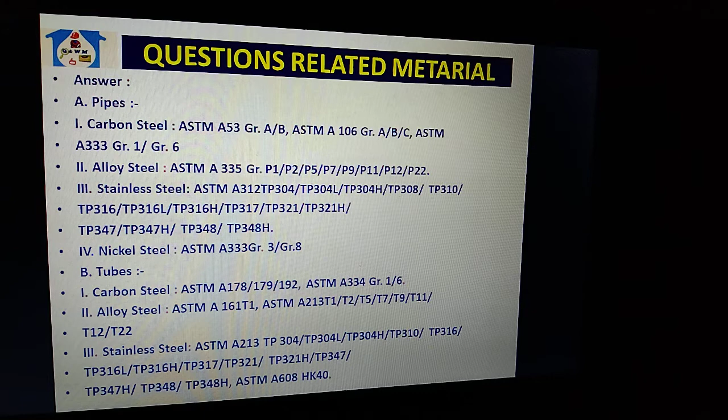Stainless steel: ASTM A213, TP304, TP304L, TP304H, TP310, TP316, TP316L, TP316H, TP317, TP321, TP321H, and TP347, TP347H, TP348, TP348H, ASTM A608 HK40.

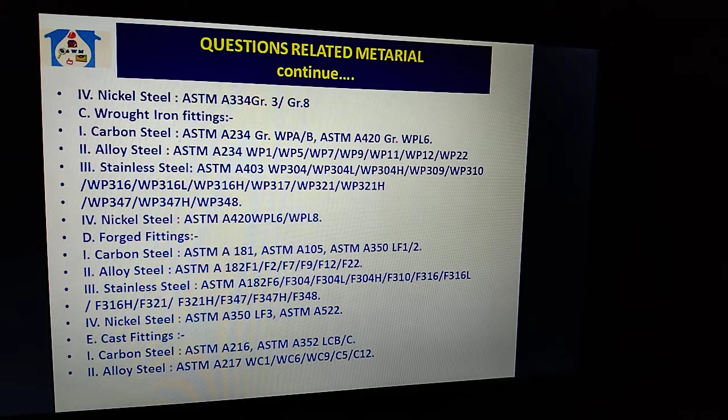Nickel steel: ASTM A334 grade 3, grade 8. Wrought iron fittings, carbon steel: ASTM A234 grade WPA or B, ASTM A420 grade WPL6. Alloy steel: ASTM A234 WP1, WP5, WP7, WP9, WP11, WP12, WP22. Stainless steel: ASTM A403 WP304, 304L, 304H, 309, WP310.

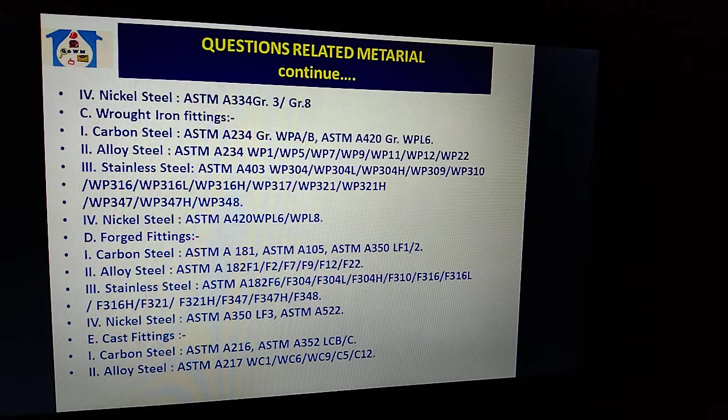Carbon steel, nickel steel: ASTM A420 WPL6, WPL8. Forged steel, forged fittings, cast iron, carbon steel: ASTM A181, ASTM A105, ASTM A350 LF1, LF2. Alloy steel: ASTM A182, F1, F2, F7, F9, F12. Stainless steel and nickel steel - all grades are noted here.

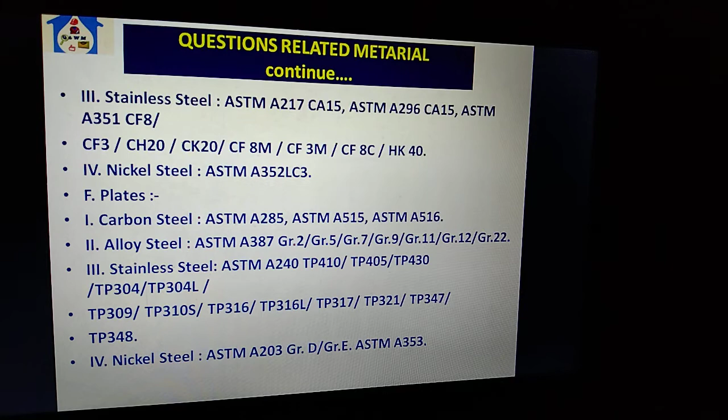What is the basic difference between pipe specification ASTM A106 grade A, grade B, grade C? Answer: the difference is due to carbon content.

Percentage of carbon content: ASTM A106 grade A, 0.25% carbon. ASTM A106 grade B, 0.30% carbon. ASTM A106 grade C, 0.35% carbon.

What is the difference between pipe specification ASTM A312 TP304, ASTM A312 TP304L, ASTM A312 TP316, ASTM A312 TP316L? The difference is due to the carbon content. The letter L denotes lower percentage of carbon.

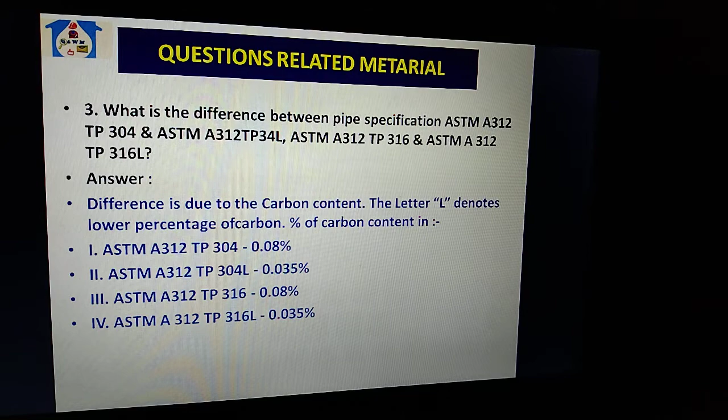Percentage of carbon content in ASTM A312 TP304 is 0.08%, ASTM A312 TP304L is 0.035%, ASTM A312 TP316 is 0.08%, ASTM A312 TP316L is 0.035%. L means lower carbon, lower percentage of carbon.

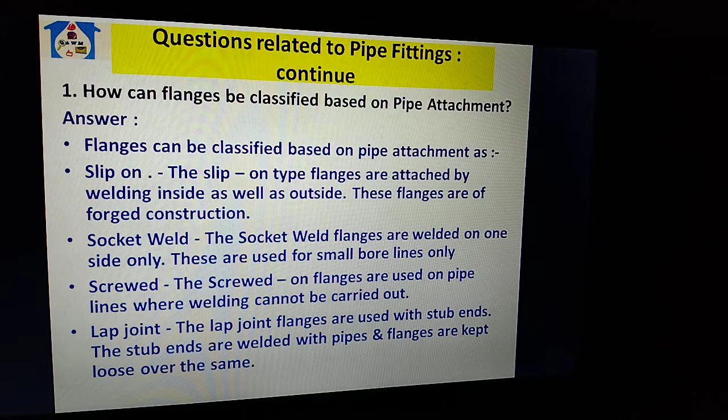Socket weld: the socket weld flange are welded on one side only. These are used for small bore line only.

Screwed: the screwed on flange are used on pipeline where welding cannot be carried out.

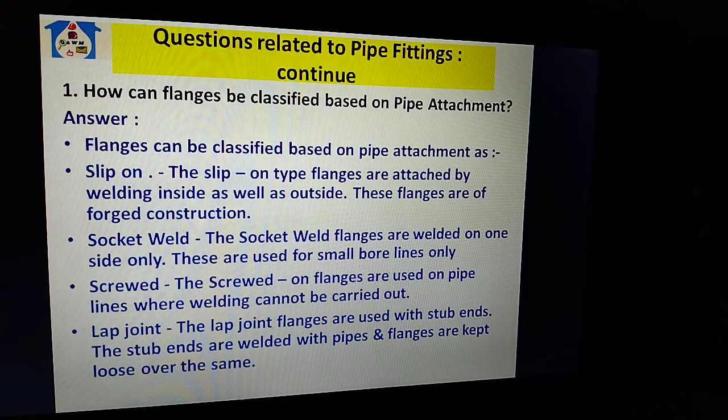Lap joint: the lap joint flange are used with stub ends. The stub ends are welded with pipe and the flange is kept loose over the same.

Question related to pipe fitting. Welding neck: the welding neck flange are attached by butt welding to the pipe. These are used mainly for critical service where the weld joint needs radiographic inspection.

Blind: the blind flange are used to close the ends which need to be reopened.

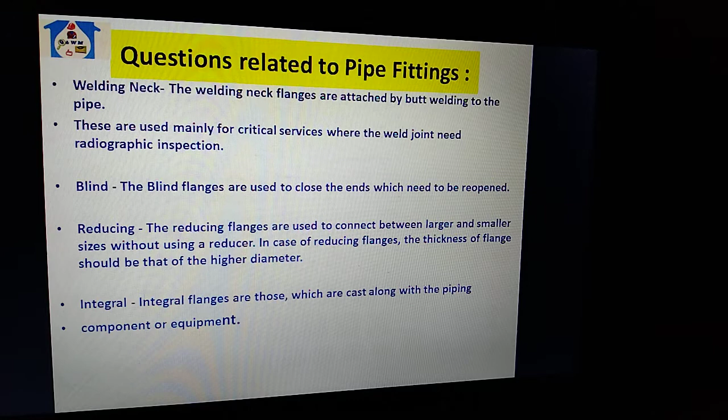The reducing flanges are used to connect between the larger and smaller sizes without using a reducer. In case of reducing flange, the thickness of the flange should be that of the higher diameter.

Integral flanges are those which are cast along with the piping component or equipment.

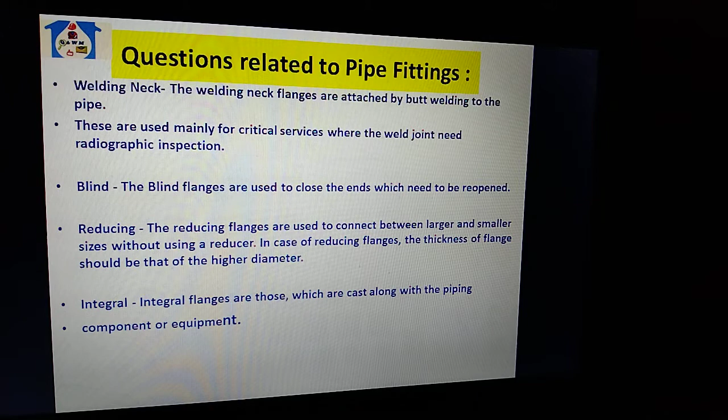How can flange be classified based on pressure temperature ratings? Answer: flanges are classified based on pressure temperature ratings.

The classes are A 150, B 300, C 400, D 600, E 900, F 1500, G 2500.

Pressure temperature rating charts in the standard ASME 16.5, which specifies the non-shock working gauge pressure to which the flange can be subjected at a particular temperature.

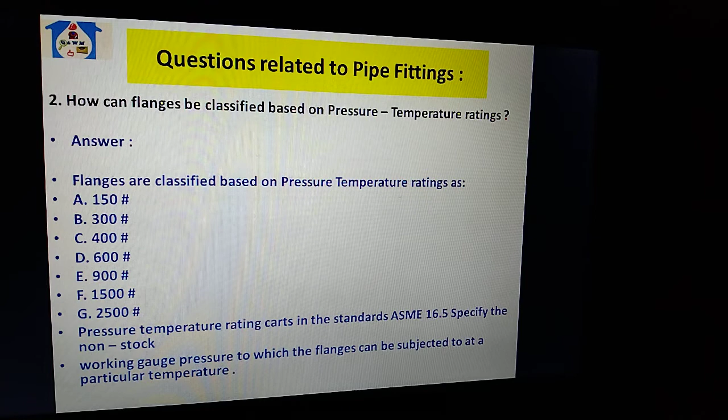How can flange be classified based on facing? Answer: flanges are classified based on facing as flat face (FF), raised face (RF), tongue and groove (TG), male and female (M/F), and ring type joint (RTJ).

How can flanges be classified based on face finish? Answer: flanges are classified based on face finish as smooth finish, and serrated finish.

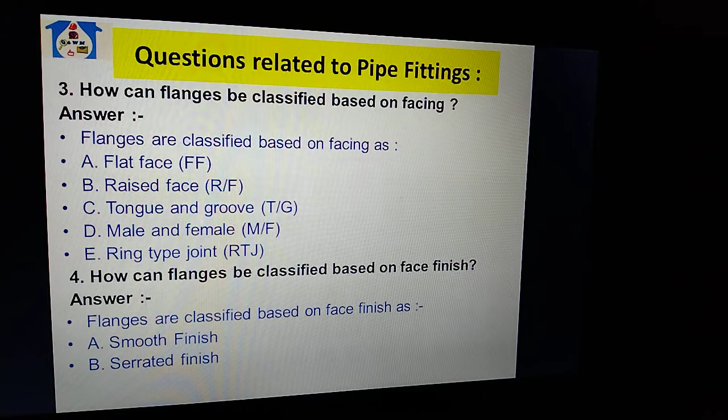Find the use of smooth finish flange and serrated finish flange. Answer: the smooth finish flange is provided when a metallic gasket is provided, and the serrated finish flange is provided when a non-metallic gasket is provided.

What are the types of the serrated finish provided on flange face? Answer: concentric or spiral, and phonographic.

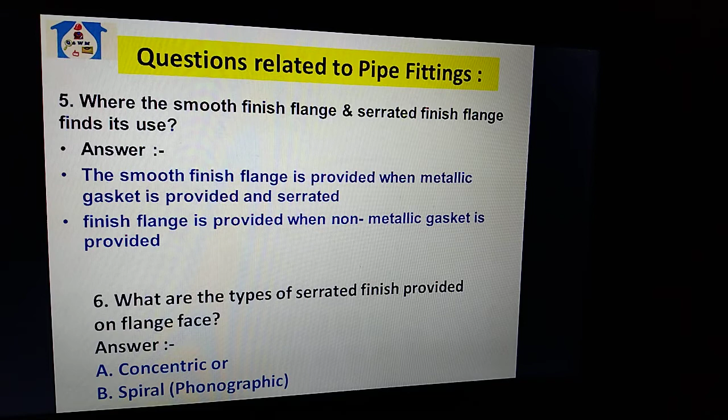How to specify serrations of flanges? The serration of the flanges is specified by the number, which is the arithmetic average roughness height (AARH).

Where is concentric serration insisted for face finish? Answer: concentric serration is insisted for face finish where the fluid being carried has very low density and can find leakage paths through the cavity.

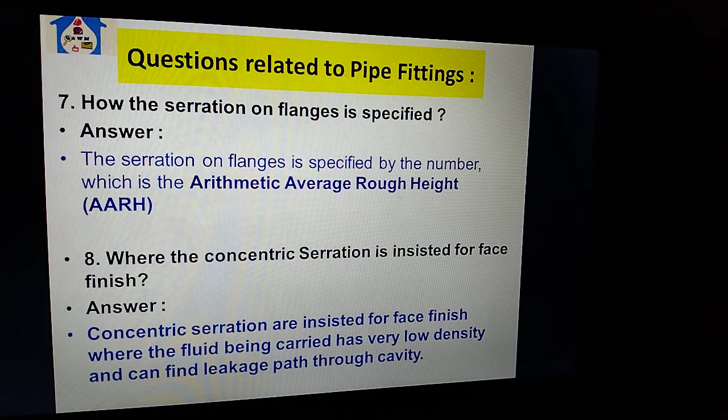What is the most commonly used material for gasket? Answer: compressed asbestos fiber.

Which type of gasket is recommended for high temperature and high pressure application? Answer: spiral wound metallic gasket.

What are the criteria for selection of MOC of spiral wound metallic gasket winding material? Answer: the selection of the material of construction of the gasket winding depends upon the corrosive nature and concentration of the fluid being carried, the operating temperature of the fluid, and the relative cost of the alternate winding material.

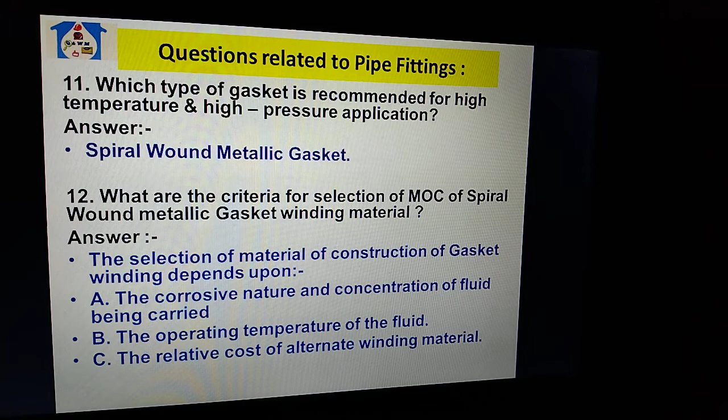What are the most common materials used for spiral wound metallic gasket winding? Answer: the most commonly used materials are Austenitic stainless steel 304 with asbestos filler, Austenitic stainless steel 316 with asbestos filler, and Austenitic stainless steel 321 with asbestos filler.

Which material is used as filler metal for spiral wound gasket in case of high temperature service? Answer: for very high temperature service, graphite filler is used. For high temperature service, the graphite filler is used.

What is the centering ring in connection with a spiral wound gasket? Spiral wound gaskets are provided with a carbon steel external ring called the centering ring.

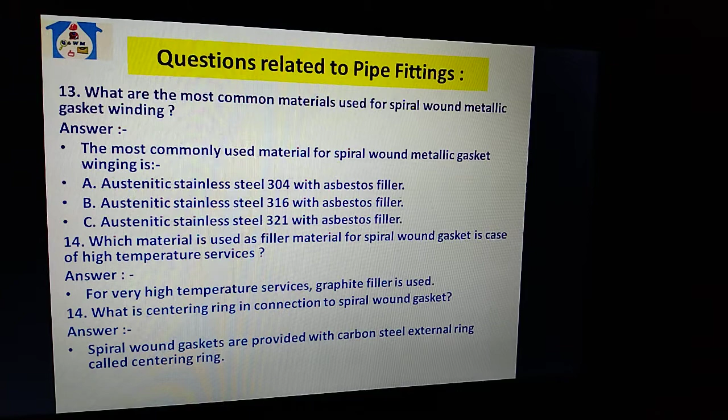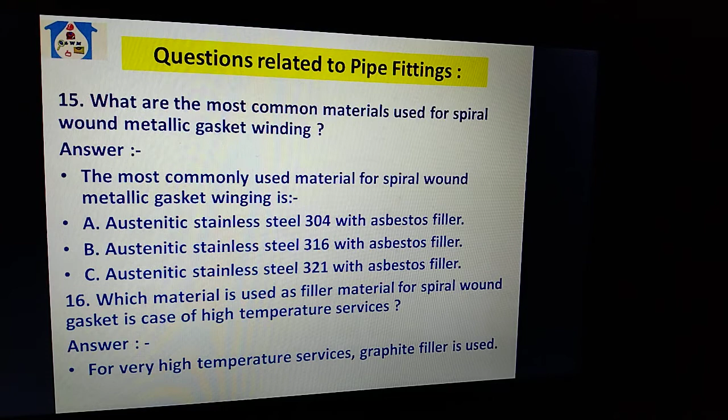What are the most common materials used for spiral wound metallic gasket winding? What will be the AARH finish of the flange face when using a spiral wound gasket? Answer: 125 to 250 AARH finish.

On which type of flange is the use of spiral wound gasket restricted? Answer: ASME B 16.5 does not recommend the use of 150# rating spiral wound gasket on flanges other than welding neck and lap joint type.

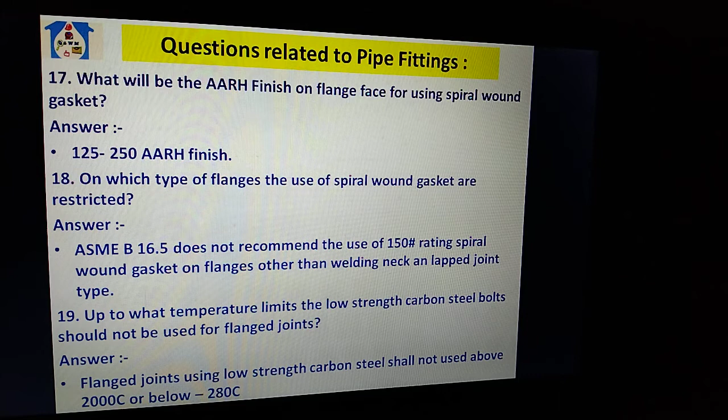Up to what temperature limit should low strength carbon steel bolts be used for flange joints? Answer: for flange joints, low strength carbon steel bolts should not be used above 200 degrees centigrade.

How are piping fittings classified based on connection? Answer: fittings are classified based on the connection as socket welding fitting, screwed fitting, bevel and butt weld fitting, spigot socket fitting, buttress end fitting.

Up to what temperature shall carbon steel material be used? Carbon steel material shall be used for temperatures up to 425 degrees centigrade.

Which material is used for temperature above 426 degrees centigrade? Answer: alloy steel material shall be used for temperatures above 426 degrees centigrade.

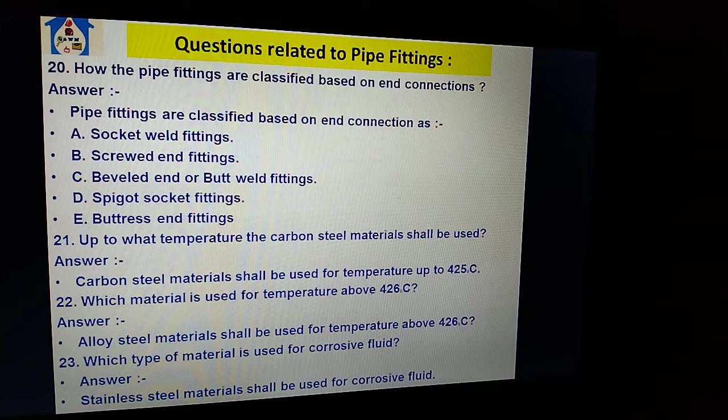Which type of material is used for corrosive fluid? Answer: stainless steel material shall be used for corrosive fluid. Which type of piping material is used for drinking water, instrument air, etc.? Answer: galvanized steel material shall be used for drinking water, instrument air and NI lines, LP line.

What is the difference between pipe and tube? Answer: pipe is identified by NB, nominal bore, and thickness is defined by the schedule. The tube is identified by OD and its thickness as BWG, Birmingham wire gauge, 1/100 inch. From which size onward is the nominal bore of pipe equal to OD of pipe? Answer: from the size 14 inch and onward, NB is equal to OD of pipe.

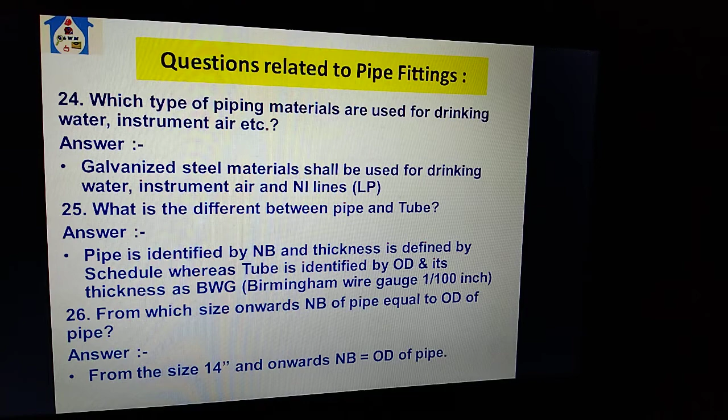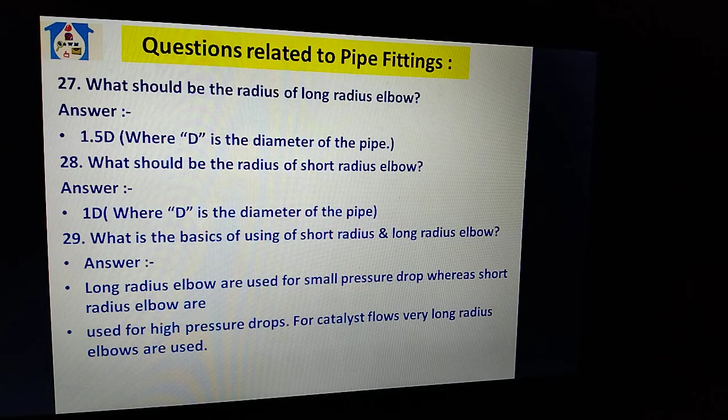What should be the radius of the long radius elbow? 1.5D, where D is the diameter of the pipe. What should be the radius of short radius elbow? 1D, where D is the diameter of the pipe. What is the basis of using short radius, long radius elbow? Answer: long radius elbows are used for smaller pressure drop, whereas short radius elbows are used for high pressure drop. For catalyst flow, very long radius elbows are used.

Where do we use the following: eccentric reducer and concentric reducer? Answer: eccentric reducer at pump suction to avoid cavitation, to maintain elevation BOP in rack. Concentric reducer at pump discharge, vertical pipeline, etc. Is a concentric reducer used at pump suction, yes or no? Answer: no. Air pockets may form if a concentric reducer is used at pump suction, which results in cavitation and causes damage to the pump. To avoid this problem, eccentric reducer with flat side up (FSU) is used in pump suction.

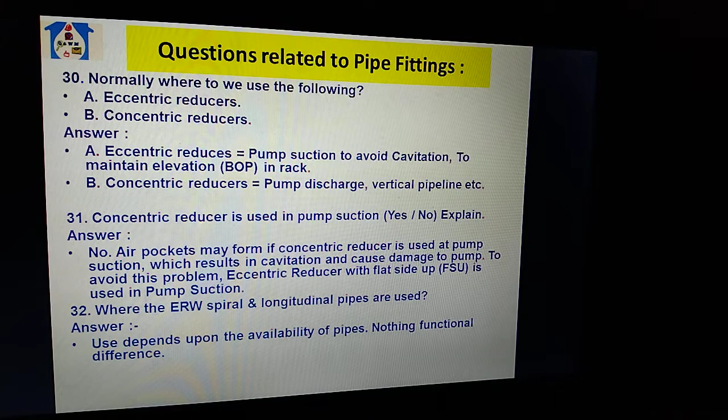Where are ERW spiral and longitudinal pipes used? ERW means electric resistance welding pipe. Use depends upon the availability of pipe, no functional difference. Where are ERW and seamless pipes used? 18 inch and above, ERW pipes are used. Below 18 inch, seamless pipes are used. Seamless pipe can sustain higher temperature and pressure.

What is the main use of ASTM A53 and A106 grade B pipes? Answer: ASTM A53 grade pipes are mainly used for utility service, whereas A106 grade B pipes are used for high pressure, high temperature service. From which side of the pipe will you take branch connection? Answer: when fluid is gas, air, steam and cryogenic service, top side. Where fluid is liquid, bottom side.

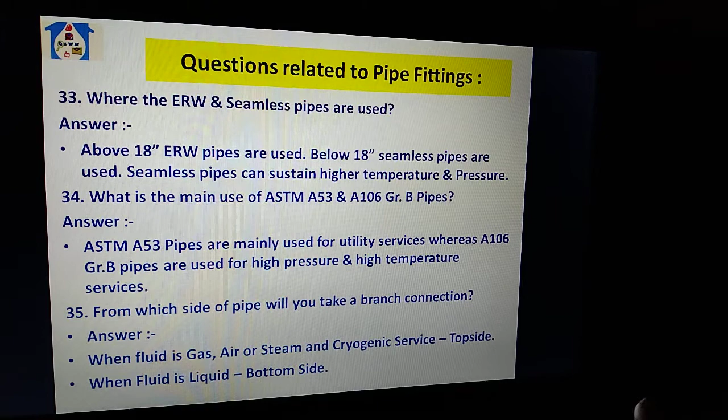Why do we not take a branch for cryogenic service from bottom side, even if fluid is in liquid state? Answer: there are chances of ice formation during normal operation, and since ice floes from the bottom of the pipe, it will block the branch pipe connection. Why do we provide high point vent and low point drain in piping? Answer: high point vent, HPV, for removing air during hydro test. LPD, low point drain, for draining water after conducting hydro tests.

What do we mean by jacketed piping? Answer: piping which is recognized as providing the most uniform application of heat to the process, as well as maintaining the most uniform processing temperature, where steam tracing is not capable of maintaining the temperature of the fluid constant. Usually used for molten sulfur, polymer service.

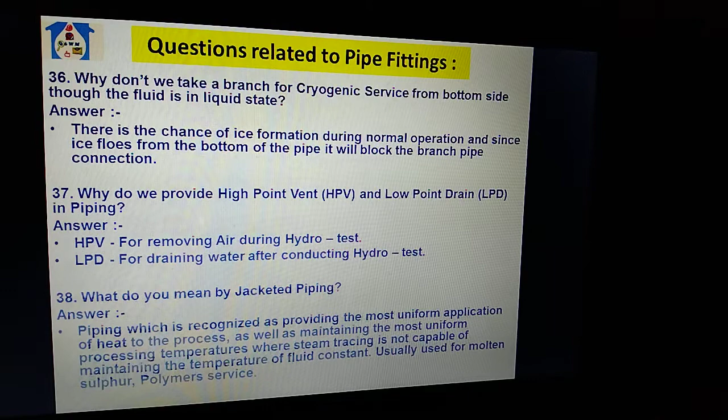What is the minimum distance between welds in pipe? Answer: the thumb rule is that minimum distance between adjacent butt welds is 1D, D means dia, and never closer than 1.5 inch. This is supposedly to prevent the overlap of heat affected zones. Minimum spacing of circumferential welds between center lines shall not be less than 4 times the pipe wall thickness, or 25 mm, whichever is greater.

What do we mean by IBR and which lines come under IBR? Answer: IBR, Indian Boiler Regulation Act. Steam lines with conditions listed below come under IBR review. Lines for which design pressure is 3.5 kg per square centimeter and above. Line size above 10 inch, having design pressure 1 kg per square centimeter and above. Boiler feed water line to steam generator. Condensate line to steam generator and flash drum. Sorry.